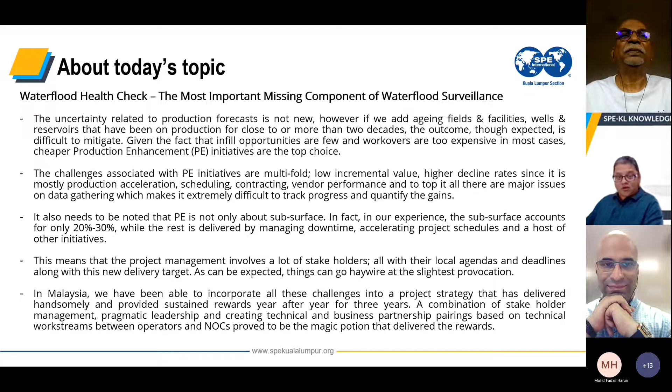Mr. Vipin Gupta joined the oil industry in the mid 80s and has worked in almost all aspects of reservoir and production engineering. He has moved across the globe in many countries and organizations. His favorite area of expertise lies in managing water floods, and he has worked on multiple assets in Mumbai High, located offshore India, with the Oil and Natural Gas Corporation, India's national oil company.

Then Petroleum Development Oman, and across Malaysian assets with Petronas. He worked with Petronas from 2012 to 2021 at MPM and was part of several water injection initiatives, contributed to creating guidelines, and has presented at numerous well integrity and workover events.

He is a firm believer that the skills honed over the years, using all available tools in petroleum and reservoir engineering solutions across diverse settings - offshore, onshore, depositional environments, drive mechanisms, geography itself - have all helped him develop a knack for decoding reservoir language. So this is very exciting. His journey in a nutshell has been about getting better at confronting, embracing, and overcoming challenges to understand the complexities of nature.

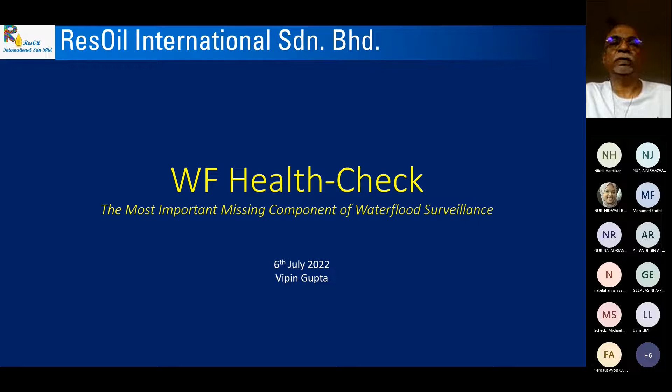In the next 55 minutes, I'll take you through this journey, which will start with basics of water flooding, envisaging when things go wrong and what exactly we can do about it - that is, through the Waterflood Health Check. What is it? Why do we need it? How is it done? A sneak peek at our methodology, working model, deliverables, timelines, etc.

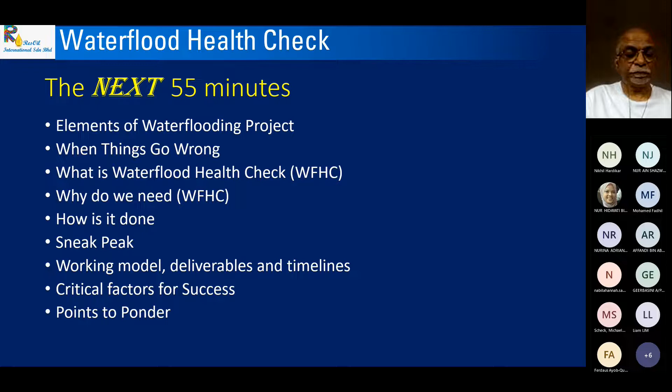Coming back to the last point would be points to ponder, where we try to see what we can think about in terms of future and what we have learned from this presentation.

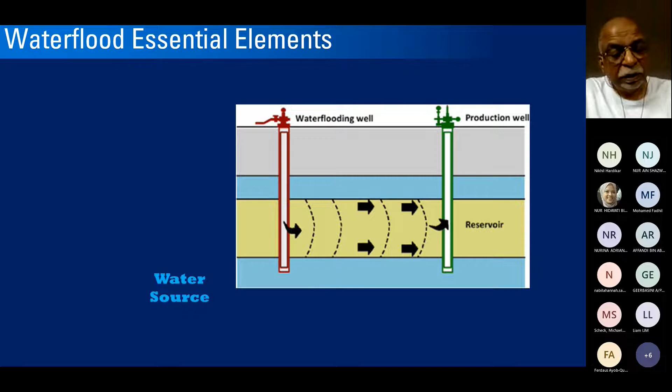I'm sure not everyone in this room is a water flooding expert, so I took the liberty of starting with the basics. In my experience, in almost every company I've worked with, water flooding was always thought to be subsurface baby - basically putting water into the reservoir to push oil to the producer, with everything related happening in the subsurface. But what is received at the terminal, what is sold, what gets converted to hard money that helps us earn our salaries, is much more than just subsurface. There are many elements to it. This needs to be understood before we push forward.

Assuming we have subsurface conditions ripe for water flooding - a sizable STOIIP, good mobility ratio, water wet conditions, good pressure above the water bubble point - taking aside all this jargon, let's say we have a field where water flooding can be done. The first thing we talk about is finding a water source.

Water source is probably something we don't think about in Malaysia because we have so much of it - our fields are offshore. But not everywhere is like that; you have fields in deserts where water is scarce. It's not only about the volume of water and the time for which it can be supplied, it's also about the quality of water, and about its interactions with chemicals and with the formation water inside the earth. All of these are very important.

Once you have found the water, you need to push it inside - that's where injection comes in. Injection is done through an injector well, let's say the pointer here - yes, this is the injector well. The injection system of pumps, pipelines, cleaning units, etc. is not a single system, it's a multifaceted system which we'll be talking about in slide 8.

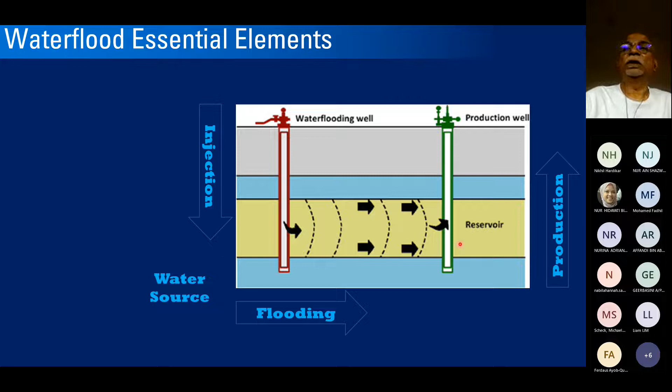Once it reaches the surface, it's taken by a huge network of many different components - surface facilities assisted by operations - to reach the terminal, where people refine it in order to sell it outside. This operations on surface is a set of flow lines, pipelines, separators, deaerators, water handling systems, cleaning units, and so on and so forth.

So as you see, we have now already seen seven different components, and there are many more essential to the concept of water flooding, out of which the flooding itself is the only one which has subsurface as a major component. The rest, all.

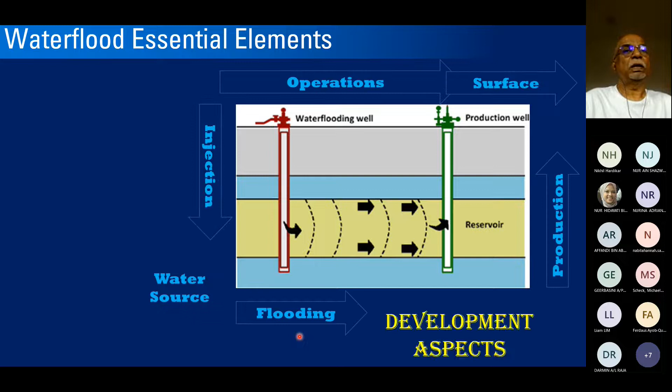When we talk about water flood success, or a water flooding project and its performance, the performance can only rise if the health of the water flood project is determined by a smooth synergy. If all these components are in sync, in synergy, working together, only then can you see the health of the water flood project as a healthy one. It's essential that this balance be maintained to maximize project performance. The point I want to bring across is that water flooding is not only about subsurface. When we talk about water flooding as a project in oil fields, it's a combination of many things, and many of those things are controlled by factors other than subsurface.

Great. So any questions at this point of time before we push on?

I think we can proceed with the slides. Okay, thank you. So now, if everything is working fine, then everything is fine.

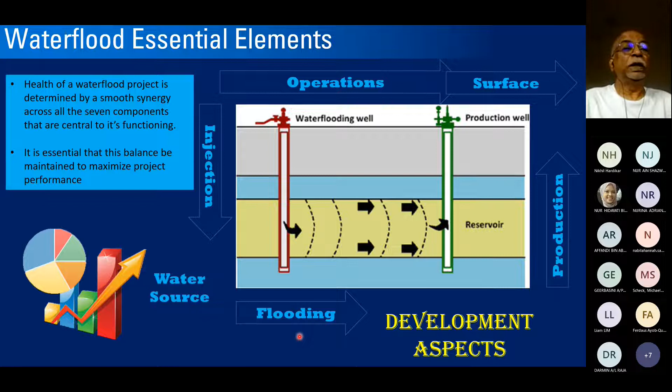But normally, nature is never so forgiving. So what happens when the alarm bells start ringing? Normally, the oil will drop, or you may have the same amount of oil but more water. So basically, you have more water cut. You have problems related to water handling, how to process more water, or maybe the injectivity drops and you can't inject the amount of injection that you need to do.

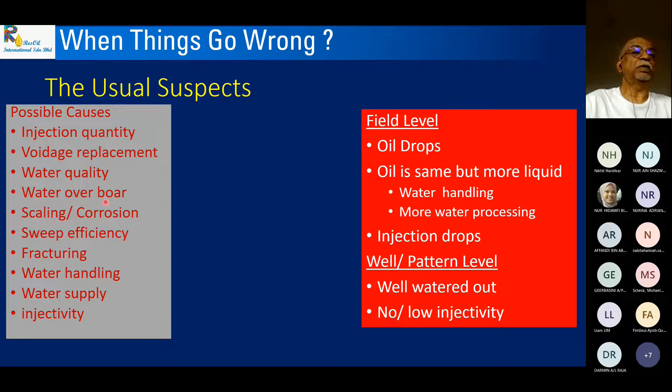At the well and pattern level, you can have wells which are watered out or have low injectivity. The possible causes could be many, and I won't read through all of them, but this includes injection quantity, voidage replacement, water quality, etc. And then the impact would always be on the uptime, the cost, production, and recovery.

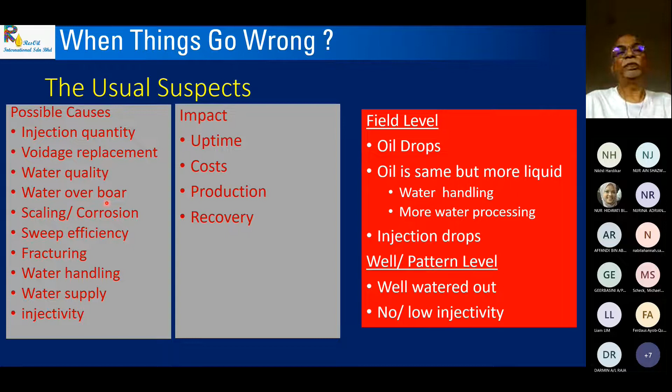This is normal when we manage a water flood project. The question always is, are we prepared for these occurrences? We know that they are going to happen. And the second question would be, could we have been better prepared? Well, people can say, you know, we have scheduled maintenance and we have this and that, but essentially, is this all working in sync? And if we could have been better prepared, how?

This is the question that we are trying to solve in the coming 40 or so minutes, through what we propose as a strategy of Waterflood Health Check.

Now, a Waterflood Health Check to me is something like when we go for a health check to a hospital, or a periodical health check. You know, most of you must be going for an annual health checkup.

So what do you do? You walk into a hospital, register yourself, and then you're given a form with a list of doctors and departments to visit. So you go to each of these departments. Somebody will check your lungs, somebody will check your eyes, somebody will check the lower parts of the body, upper parts of the body, and so on and so forth.

At the end of the day, all that data is assimilated into a matrix by an expert who tries to find out whether your body is healthy or not.

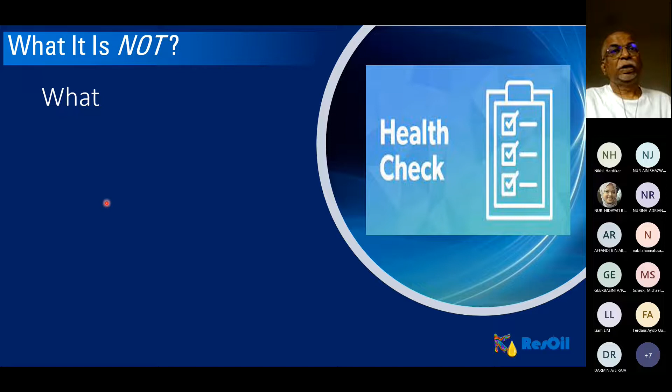Well, it is basically similarly a health check for a waterflood project is a process to assess and evaluate every aspect of a waterflood project, with an objective.

Now, this objective is to understand current performance and projected future forecast. So basically, when we started the project, we already know that this is where we are. And in a year's time, or in 2 years' time, this is where we want to be. So this is where the comparison is.

In terms of us, the doctors try to assess that, okay, this guy is 40 years old, so this is where his blood pressure should be, or his diabetes should be, or the health of his heart should be in this range, with reference to initial estimates and profiles. So this is what it is.

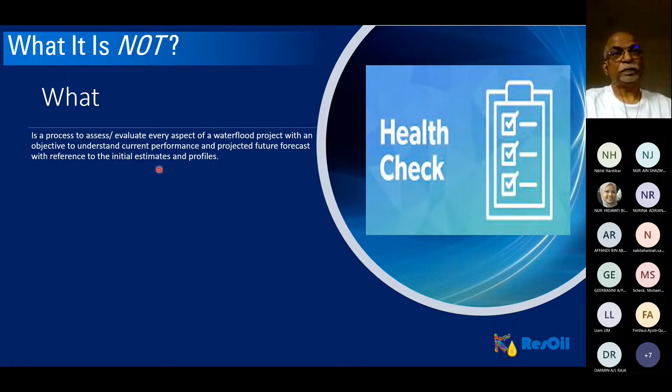But let us also very clearly state what it is not, because this is something that we have seen over the years, people understanding or misunderstanding what waterflood health check is. So it is not a detailed performance analysis project.

So don't think that this is a study team which will take all your data and start simulating and drawing decline curves and this and that. It is not a detailed performance analysis. It is not designed to provide solutions, but is going to identify the problem areas.

It is not going to impose additional work for project teams. So do not be afraid that by inviting another expert, we will be asked to do much more. The project teams which are already burdened with so much work would not be asked to do a lot more work.

Okay, second point here is that the modus operandi is that our Waterflood Health Check team will talk to your asset team on various topics, and their assessments will be taken on board. These assessments will have to be backed up by the data, and this will help them construct a scenario of where the health lies.

We'll go into the details as we go forward. The data acquired by the health check experts is examined by our experts for estimating short-term and long-term impacts if there is a problem on the project delivery, and for providing inputs on mid-course corrections, if any.

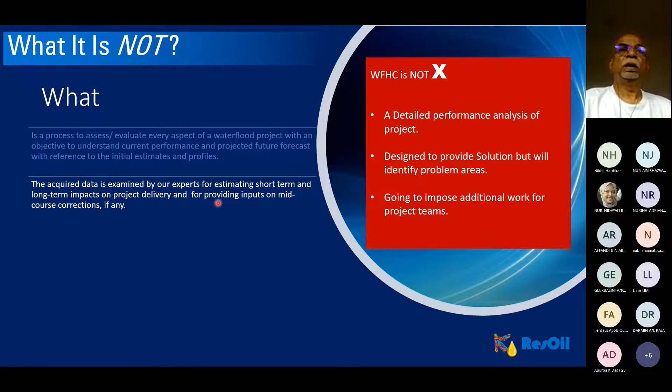Third part, and this is the more important part when it comes to Petronas: in case of multiple waterflood projects, let's say you have several waterflood projects and the measurement technique is the same. Then the data can be normalized to compare the performance or health of one waterflood project against another, almost like creating an internal benchmark. The process acquires true potential via development of indices for individual process rankings and project rankings, evolving into an internal benchmark.

So this is about what. Now let's go to why.

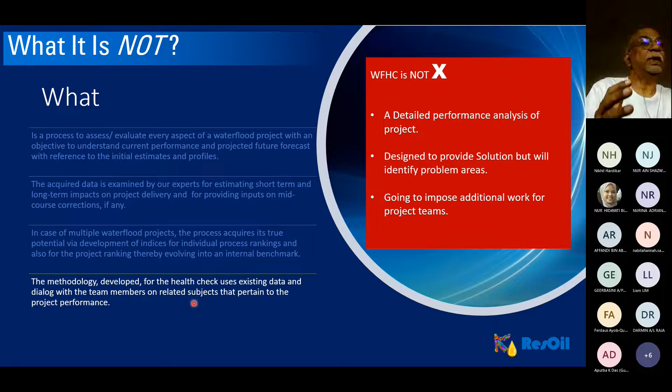But there's still one more point. This methodology developed for health check uses existing data and dialogue with team members on related topics, as I had already told you. Why this point is put here is everything that the health check team can come up with is dependent upon the integrity and sanctity of the data that is provided to them. Garbage in, garbage out, or something like that.

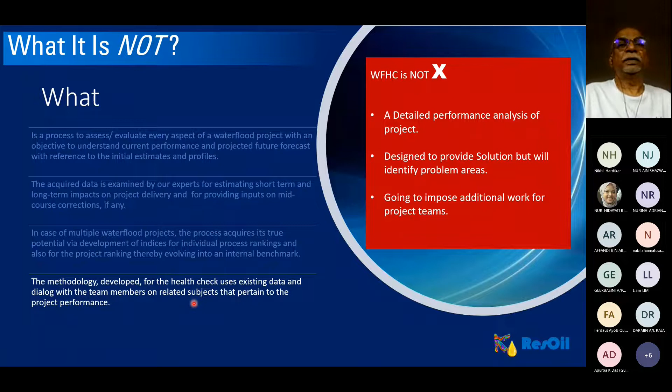So out of the 7 elements of waterflood projects, you may say that 3 or 4 are fine, but the other 2, if they are not working, if they are not in sync, then they will have an impact on the total waterflood project performance.

And this is the main issue in oil companies, that we have so many departments looking at these 7 elements, and they all have their own different methods of monitoring. Not every time are the results shared amongst each other, neither does the result of one impact the other. So what happens is this synergy and balance is not always there, and this is because of the different agencies, different departments, and the way we work.

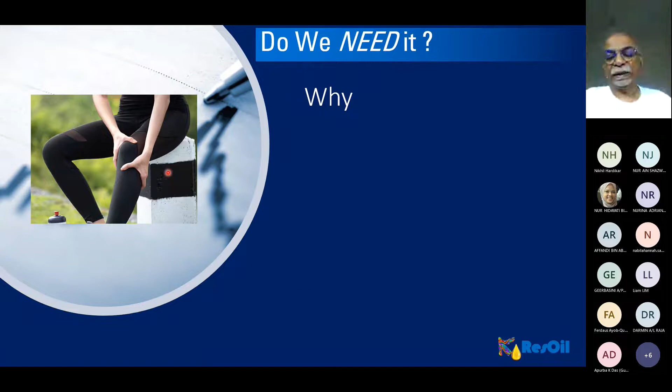Oh, why? Of course, by now, I don't think we have to explain why, but just to document it: health checks serve the basic but essential function to examine, assess, and provide insight on the current performance for every component that impacts the water flooding project.

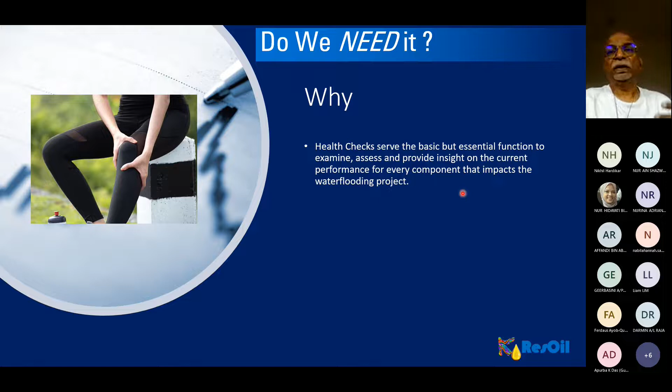Now, when we start a water flooding project, we already have some idea of how things are going to behave. But as I said, nature is not so forgiving and neither is it so cooperative. So what happens along the way is you start facing problems. Sand will come out, water will be higher than what we envisaged, or gas will go up. There would be corrosion in places, influx will be impacted, scaling, influx issues, lift performance, and so on and so forth.

If we have a health check periodically, it will give you the current state of health. It will also give you a view of the troubles ahead. Just like when your doctor says that if you don't lower your salt, you are likely to have blood pressure issues, this will give you a view of the troubles ahead, the possible impact.

So what happens if this parameter goes up, and how will it impact the recovery and the performance? What are the steps to follow? What are the things we should observe, the metrics and triggering points for the future? What are the places where actions have to be triggered?

Indexation of performance, we already talked about this when we discussed multiple projects. Indexation of performance can lead to development of an internal benchmark, resulting in identification, higher focus, and triggering actions. Combining the result with the complexity index.

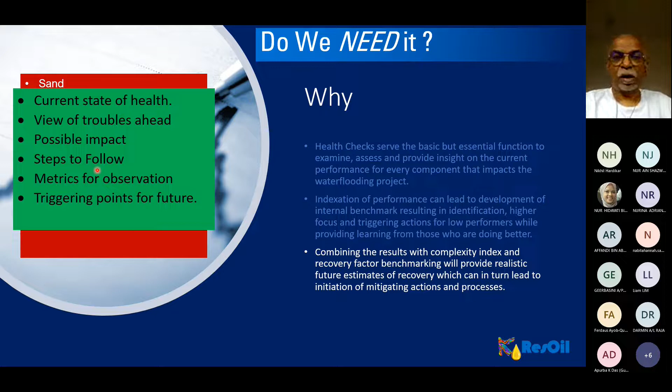The next slide will take you to the meat of the process, where we talk about each component and the details of each component. Excuse me.

So let us say we start with the water source. Within water source, what we have is the source of water, the compatibility with the rocks, the scaling control, the corrosion control, the souring control. These are all things that have a relationship with what kind of water it is. And even though scaling, corrosion, and souring will probably happen at different times and impact different things, the starting source is water.

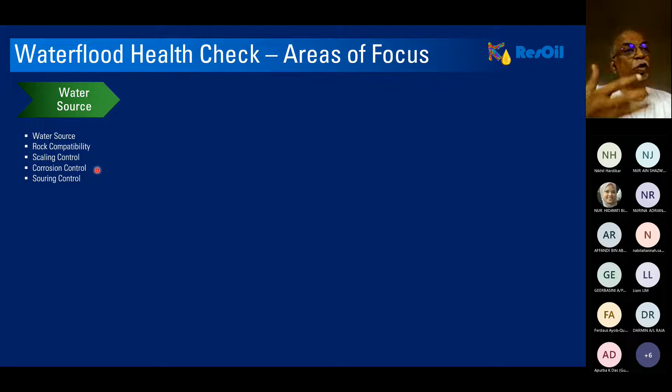And this is what we need to keep in our sight. It may be necessary that we do not have an alternative source of water, therefore we know that these things are going to happen. The question is, are we prepared? How can we prepare, and when should we be prepared for this?

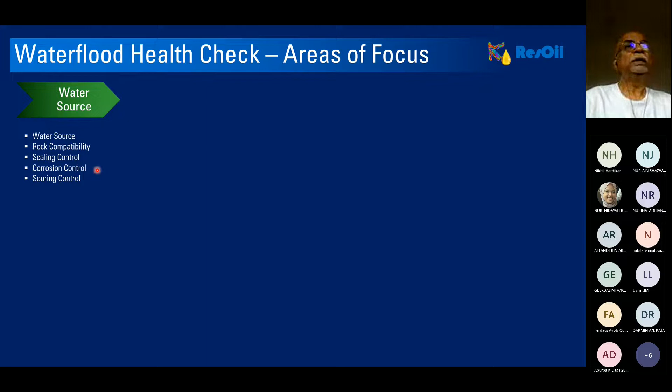Going ahead would be the water injection. Water injection is multifaceted, like I said. So you have injection well selection, well completion, matrix injection, fractured injection, injectivity, solids and oil control, well integrity assurance. These are all the things that are impacted in the water injection system.

Now, the thing here is that, like I said, the modus operandi is that there will be a Waterflood Health Check team and the asset team, and they will have a long dialogue over probably several days or a week about these things. So these are the topics on which the queries and questions will be based, and these queries and their answers will determine for the health check team where we are in terms of all these subtopics or focus areas.

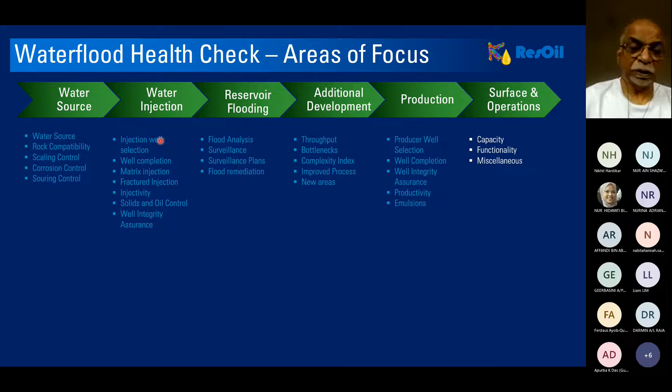Last but not least is surface and operations, which is about capacity, functionality, and many miscellaneous subjects. Please don't ask me questions on this - I'm not an expert, but I'm sure, considering in the whole system, surface and operations has the biggest number of components, and I'm sure these all need to be kept in sync.

Now, what is the methodology? The methodology part 1 consists of interactive collaboration between health check teams and asset teams. The health check process provides a holistic view of the project, examining dependencies while rooting out redundancies.

What it means basically is that there will be a team of people headed, or controlled, by a production chemist who talks to the production chemist or people looking after the chemistry of water at the site. They will be talking about the water source and quality of water. So they'll be checking the water chemical analysis, and checking the compatibility of rock, if there were any laboratory tests done.

And similarly, the teams will be there for each of these 6 components. It looks for signs of weakness that are causing inefficiencies or may become problematic in future. So this is the main objective of the health check - probably the same objective as when we go for a health check of our bodies.

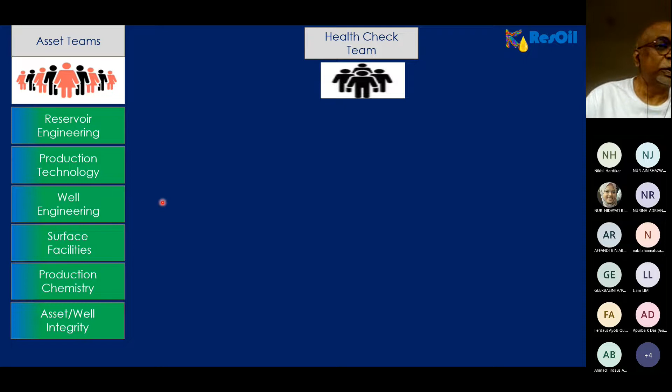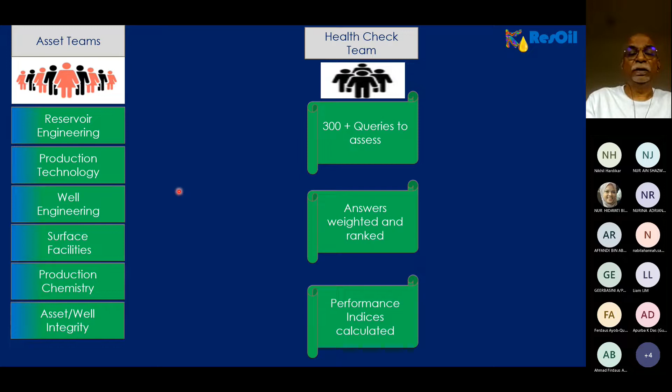So this is how this happens. You have asset teams, and then you have health check teams. The asset teams include reservoir engineering, production technology, well engineering, surface facilities, production chemistry, and asset well integrity. Then you have health check teams, which have question banks and queries to assess. Once they get the answer, they weigh the answers, put a certain weightage on it, and give it a ranking.

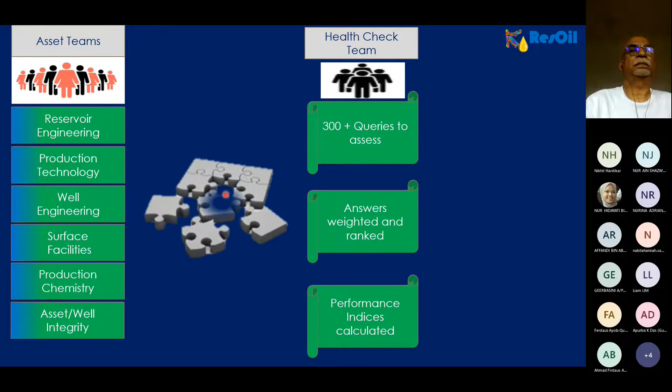Then, using an internal algorithm, that ranking is used to come to a scorecard, and the performance indices are calculated. This shows the interaction between the two teams, and the three main pillars guiding this are active dialogue supported by data, and knowledge sharing, in order to promote the 3 Ps: a better process, people who are more empowered and knowledgeable, and naturally moving toward profit.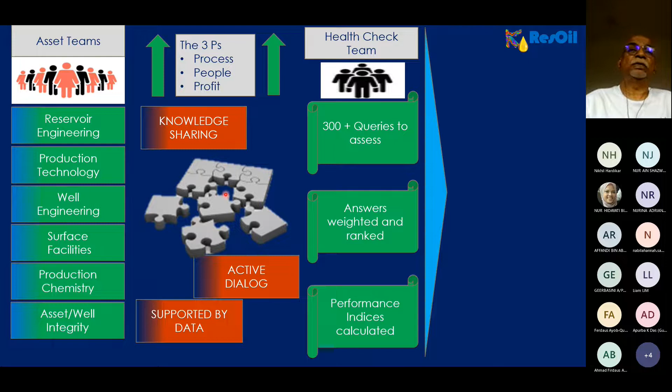What all of this is focused to deliver: Deliverable 1, which is technical, is a clear status report on each component of the water flooding project, a gap analysis with respect to expectation and actual performance, projected impacts if business as usual continues, and recommendations for mid-course correction. This is the technical deliverable from the Waterflood Health Check team after going through the process.

Deliverable 2 is about the process itself: analysis of the business process workflows, identification of points that impact decision making, and recommendations. Naturally, they can only recommend, and it's up to the management to decide whether the BPWs need to be amended or modified.

Deliverable 3 is the benchmark, and this happens only when you have multiple projects: development of performance indices for each component, an overall scorecard, and an internal flood performance benchmark. This is actually very important, and in our case we know it's there because it can also guide and drive the maintenance and planning strategies.

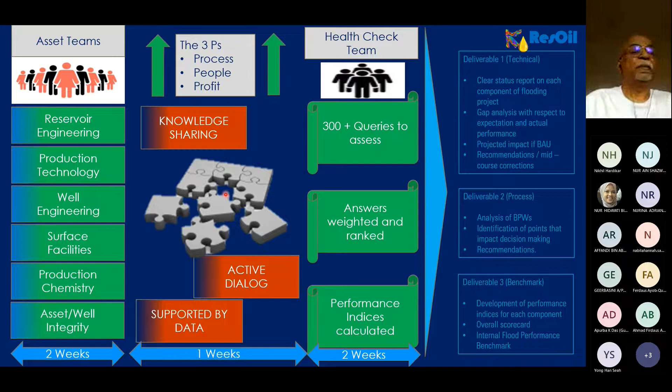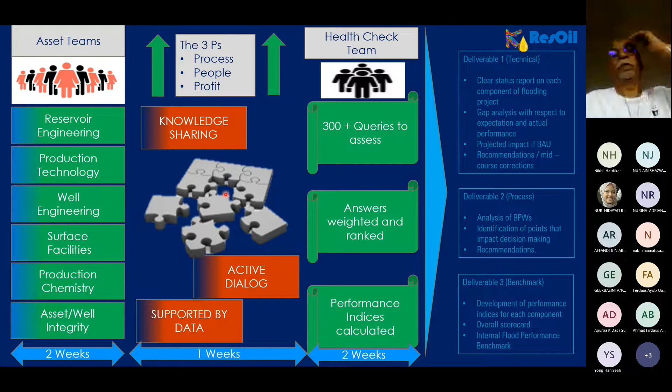Now that we've looked through this, I'll take a sneak peek into how the process actually works. Basically what we normally do is give two weeks for the teams to prepare before we start the dialogue. One week is for the dialogue and interaction between the two teams, and then the following weeks are for preparing all the deliverables, the reports, and crunching the data.

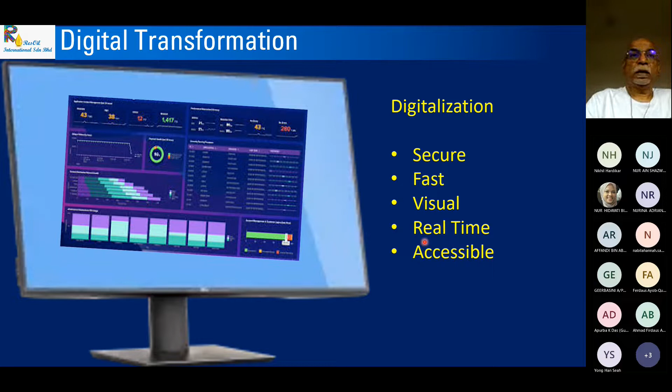End results give the current status of each component of the project at the required level of hierarchy, which means that if you want to talk about a reservoir, if you want to talk about the field, if you want to talk about a particular set of wells, all of that can be managed.

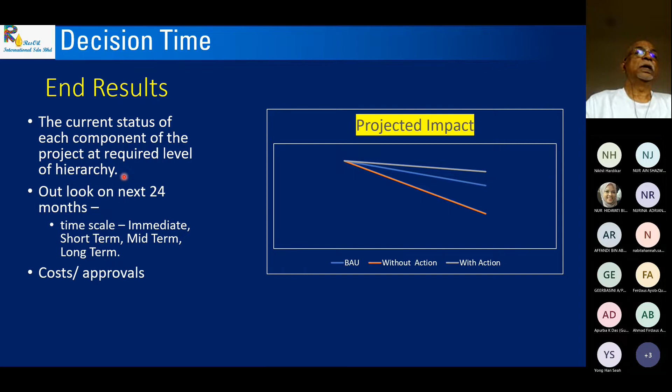Outlook on the next 24 months. This is arbitrary, basically because we think that at least in 24 months we should have the health check, so this will give you the time scale. In terms of what action needs to be taken: immediate action, short-term action, mid-term action, and long-term actions. So this is what the outlook on the next 24 months will give.

What are the costs involved and what approvals are needed in order to make these actions happen, and the projected impact, which is already there.

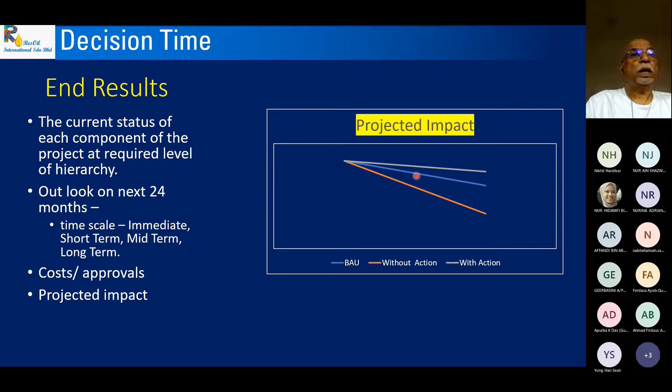So now we go to the critical factors of success for Waterflood Health Check, to basically come up with results that mean anything. The asset team has the actual information, and they are the backbone of this whole exercise. So when the health check team is assessing information from the asset team, if they are able to communicate well and if the information is passed on correctly, then the results are expected to be much better.

First-hand information, directly from the source. We do not want somebody telling somebody what to tell the Waterflood Health Check team. The dialogue is in a dialogue mode with a common vision. Like I said, these are doctors. We want to make the project healthy, and the asset team has the same vision. So success of the project being the objective, it's a dialogue based on a common vision.

The objective is to improve from the starting point and not blame the past, and therefore be able to anticipate and prepare for events that may disrupt, as a normal health check would.

Okay, so this brings me to the end of my presentation. There is a potential business opportunity if we want to go forward, mainly because it has got a very simple process, low manpower, quick turnaround. So we are talking about 3 weeks.

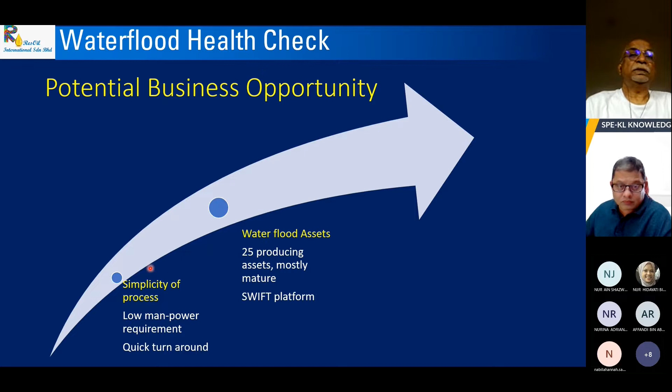Waterflood assets—I have just taken a Malaysian problem. So you have 25 producing assets, mostly mature, and there is a Swift platform which has all the data along with them. So the Swift team, assisted by the Waterflood management team or the asset team, can very easily and very fast get to the readiness of interacting with the health check experts.